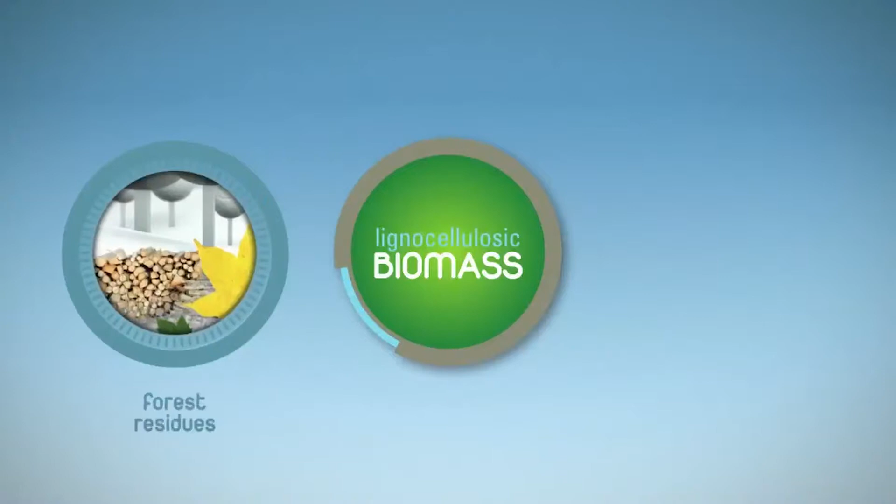These biofuels, which are intended for automobiles and aeronautics, come from the transformation of lignocellulosic biomass, such as forestry byproducts, straw, or dedicated cultures. For their development, the BioT-Fuel partners will validate the technical and economic feasibility of innovative production technologies in 2 pilot plants.

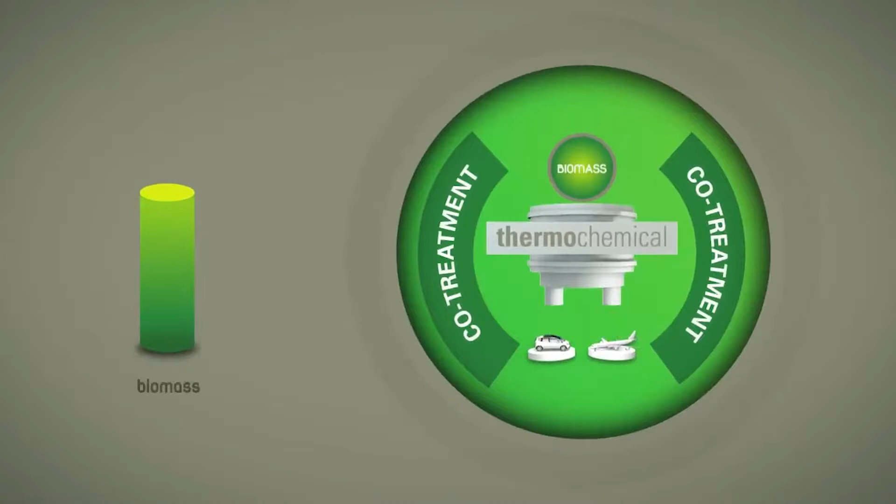BioT-Fuel will use thermochemical processes that transform biomass into biodiesel and biokerosene. BioT-Fuel has opted for flexibility by adopting the innovative co-treatment concept, which makes it possible to combine biomass with fossil charges. Co-treatment thus ensures a constant supply of the plants, while biomass production is undergoing seasonal fluctuations.

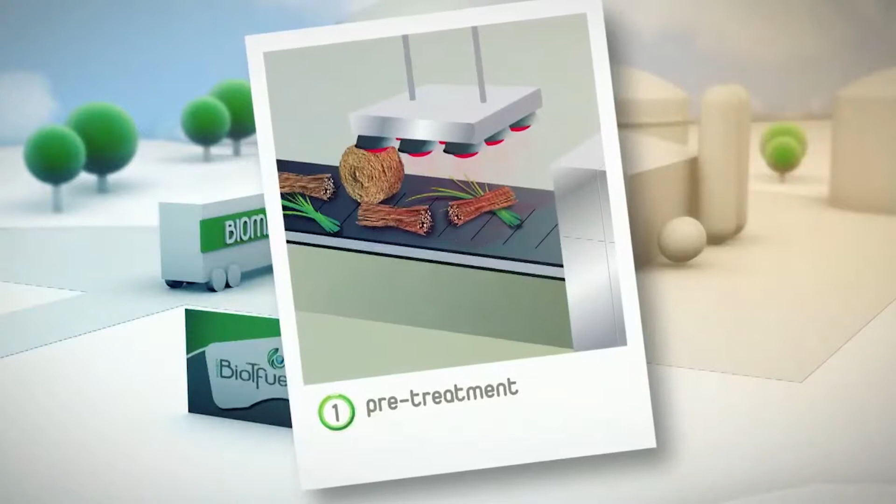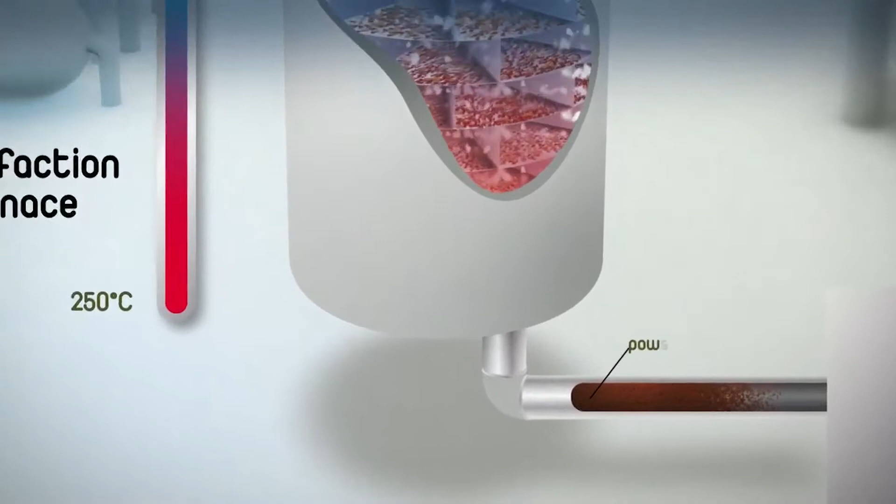The BioT-Fuel production process consists of 4 stages. Everything begins with the pre-treatment. During this first stage, the biomass is dried, crushed, and then preconditioned by torrefaction. The final crushing phase of this treatment makes it possible to obtain a powder with the requisite characteristics for optimal injection into a gasifier.

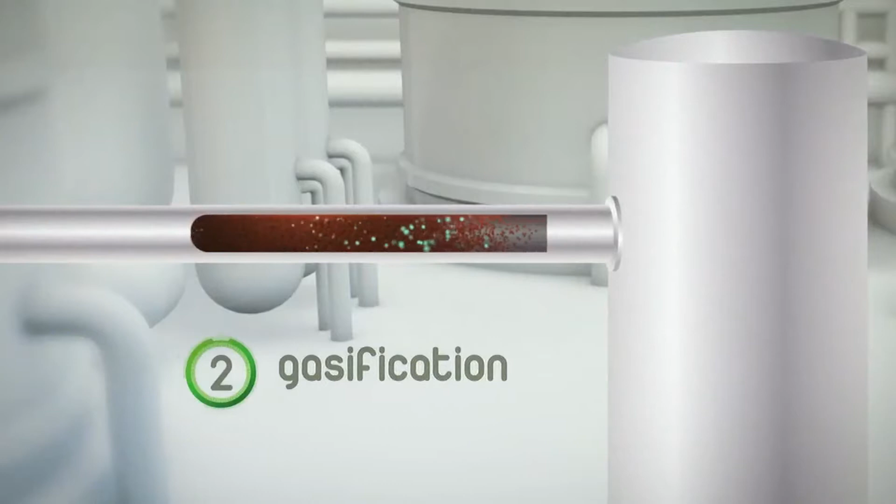The torrefaction takes place at Venette, near Compiègne, while the subsequent process steps are performed at Dunkirk. The second stage is gasification. The torrefied solid matter is transported to a second site, where it is heated to a very high temperature in the presence of oxygen in an entrained flow gasifier, and thereby transformed into synthesis gas.

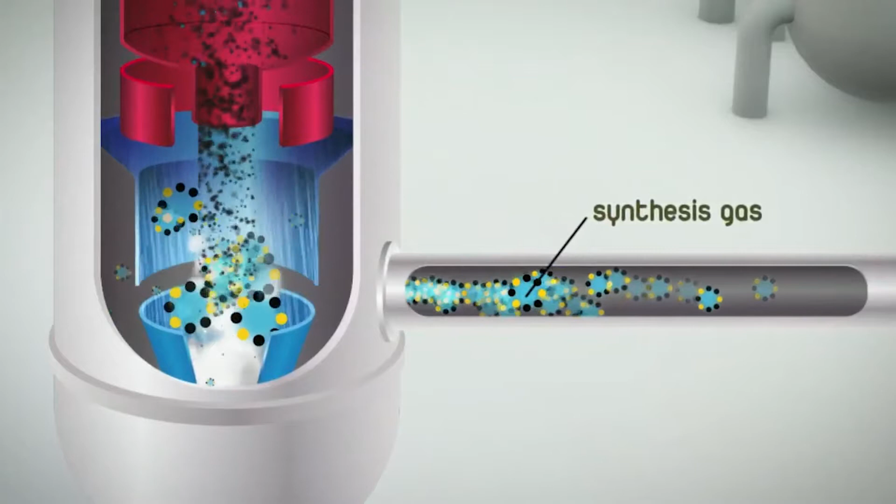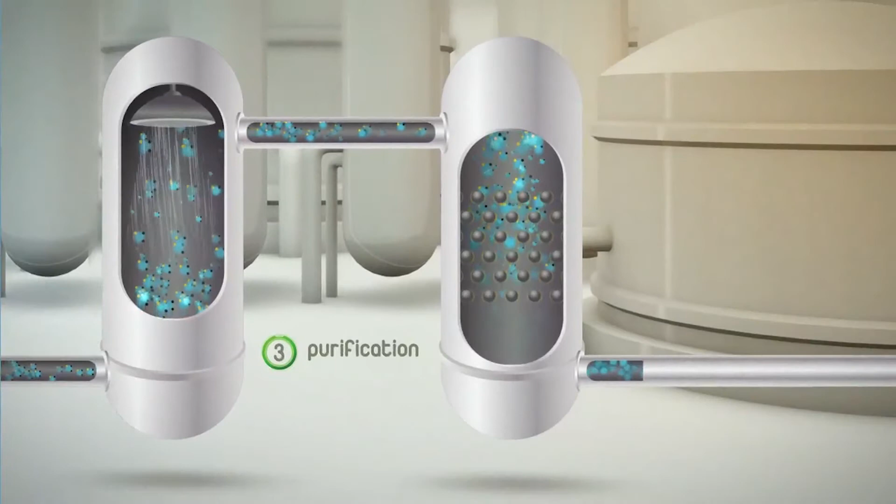This synthesis gas must have a high degree of purity so that it can be transformed into liquid fuel. The purification, which is the third stage of the process, consists in particular of washing processes using solvents and catalysts.

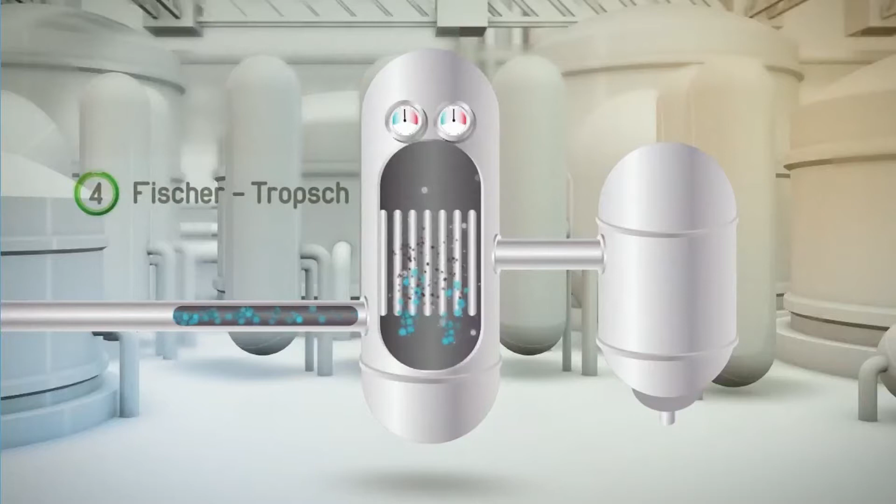The last phase is the final conversion by the so-called Fischer-Tropsch synthesis. This catalytic operation converts the purified synthesis gas into a liquid hydrocarbon mixture.

The combination of these processes makes it possible to produce biodiesel and biokerosene of high environmental quality, which in particular permits a substantial reduction of CO2 emissions.

BioT-Fuel will make it possible to develop and validate a technology for the production of biofuels that can be used alone or mixed in any type of diesel or jet engine. This technology, which can be sold all over the world, will come to market by the year 2020.

With its large-scale demonstration facility, BioT-Fuel will contribute to the development of the energies of the future by meeting the environmental challenges of the 21st century.